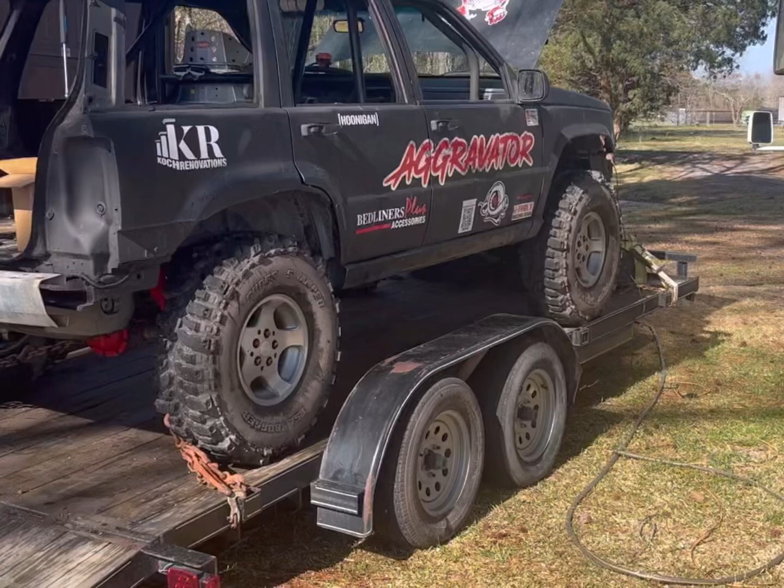So Jackson is at school. He's getting picked up right now. He's going to be here, but I'm going to go ahead and get started on a couple things without him so we can get this done before dark, hopefully.

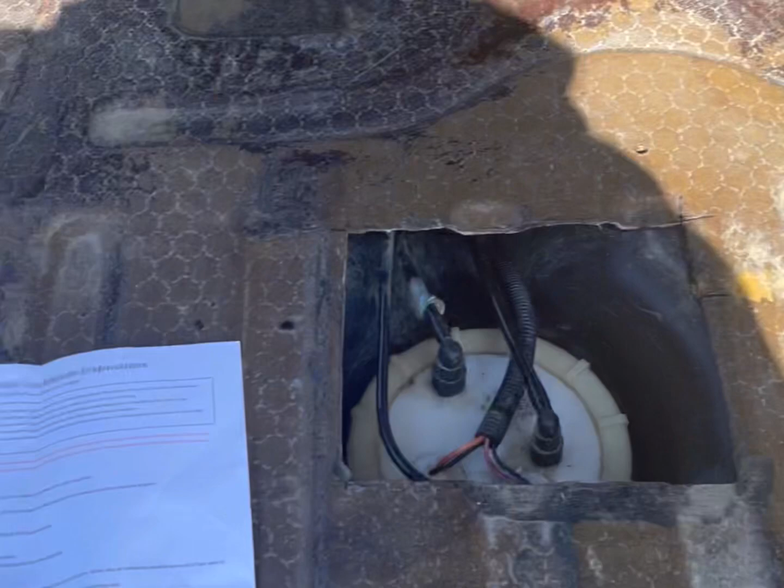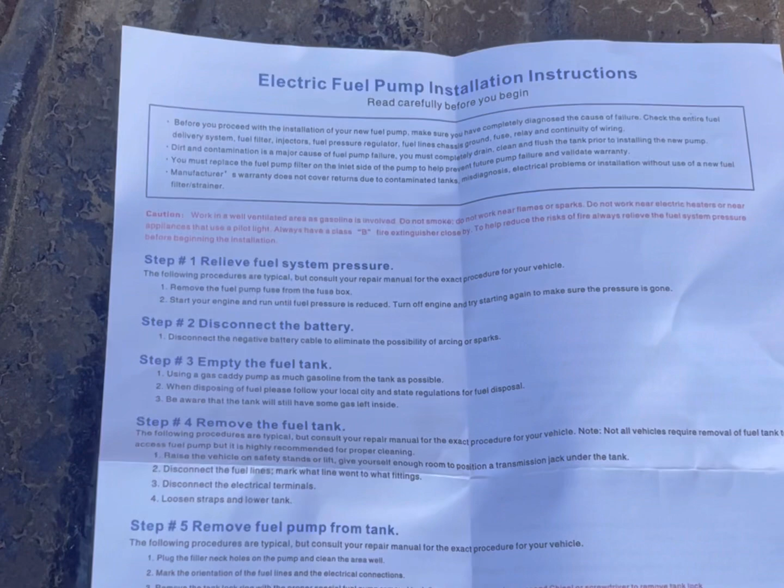You'll notice we got our new fuel pump here that we ordered from carparts.com, and we have the instructions. Step number 1 says relieve fuel system pressure. Well, we don't have to do that because we ran it out of gas and there's no fuel in it. Step number 2 is disconnect the battery.

Most cars, you got a battery there and you're going to want to disconnect those. With our truck, it's set up a little bit different. We have a battery kill switch in here, which cuts off all the power to the truck. And you can see if we turn this on, we have power. You can hear the beeping. If we turn that off, there's no more power. So that's the same thing as disconnecting the battery.

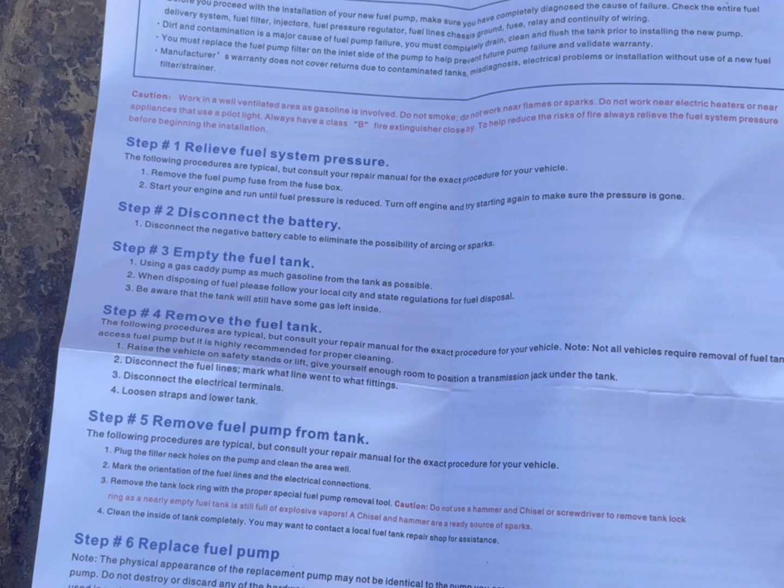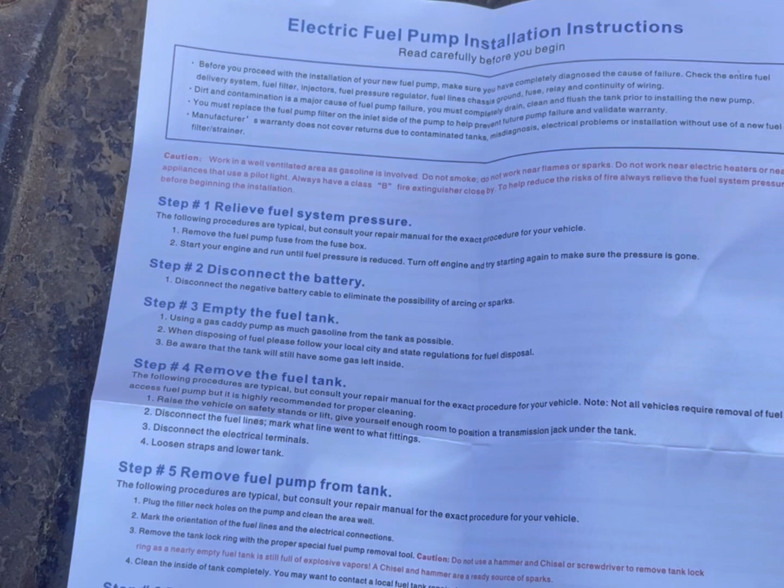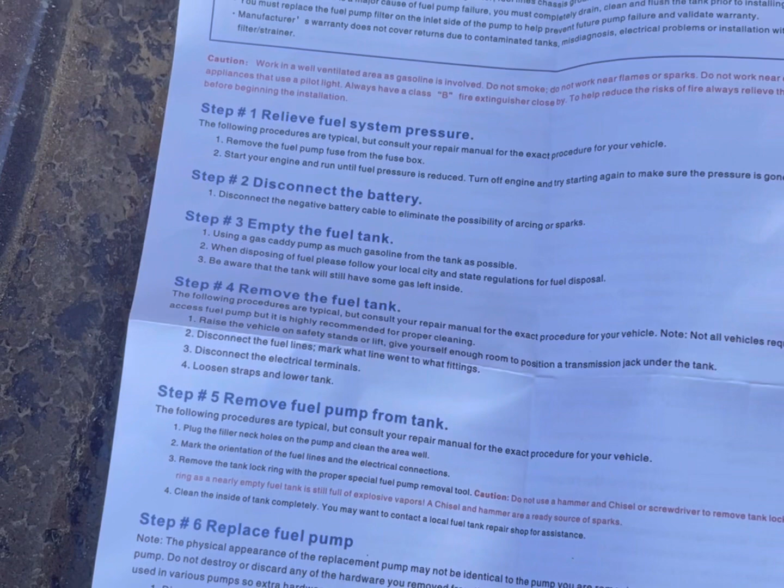So step number 3 says empty the fuel tank. We're going to ignore that step. We emptied it on our own at the racetrack by running it out of gas, and we didn't fill it back up, but we're going to have to do things a little bit differently, and I'll explain why in a second. Step number 4 is remove the fuel tank. Probably want you to empty the tank because it's pretty heavy, and if it was full, it'd be really, really heavy. But we're not going to remove the fuel tank.

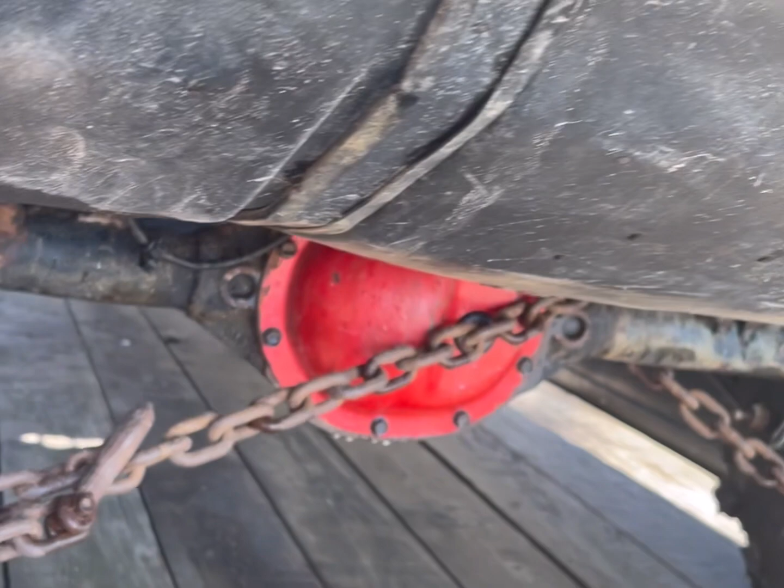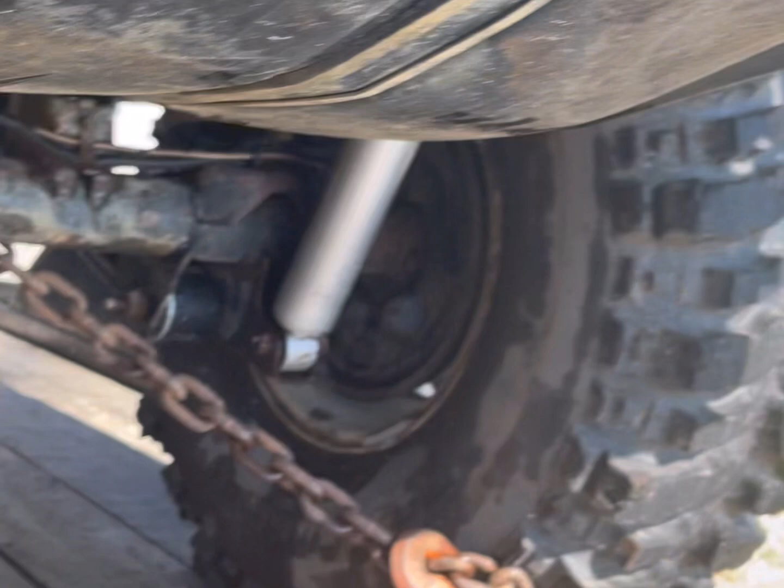On most cars, you would have to come over here, and you'd see they got these straps here, and somewhere along that strap is a nut, and you'd loosen that up, and these straps would come down and slowly lower the fuel tank down, and then you'd get rid of them. But since this isn't your average everyday car, and we've had similar issues with the pump already, we went ahead and just cut a hole in the floorboard, and we accessed the fuel pump that way.

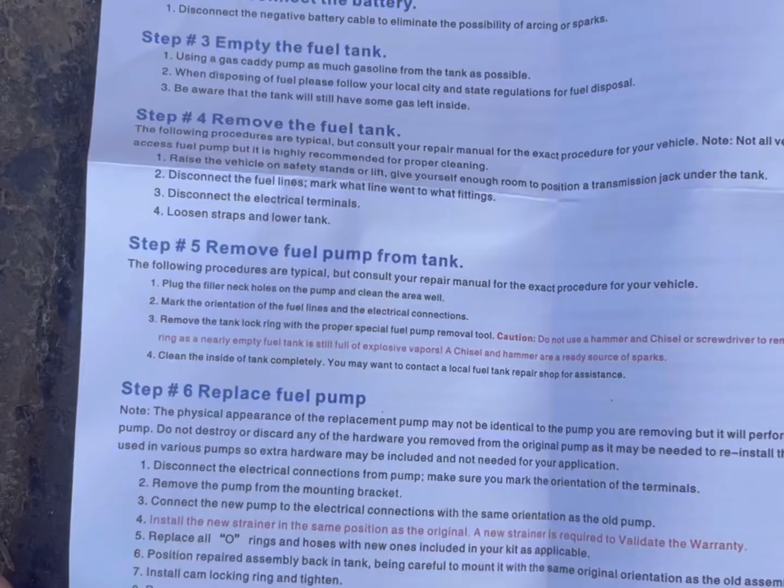Step number 5, remove the fuel pump from the tank. So, you can see on here there's this outer ring here. This turns, it's not going to turn very easily. What I'm going to have to do is get a hammer and a flathead screwdriver and tap it in the loosen direction until that ring starts to turn, and then I can turn it with my hands. So, we're going to pause and I'll update you in a minute.

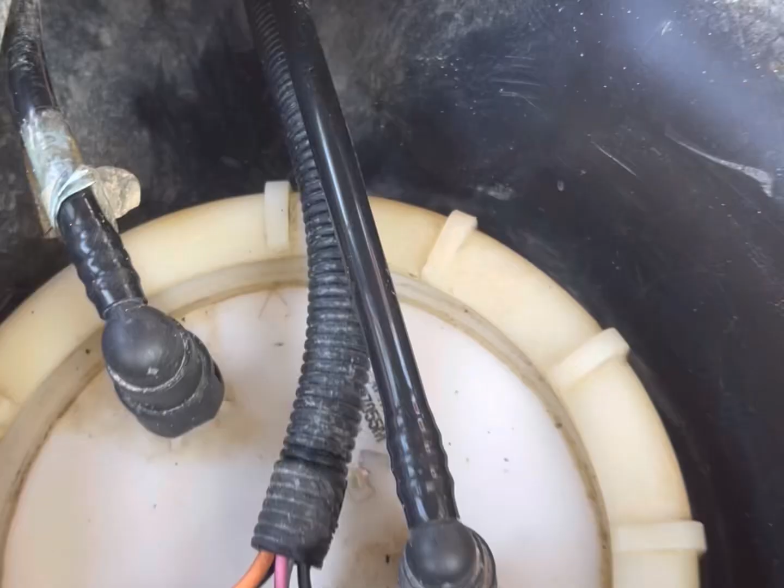Alright, so now we've loosened the ring. You can see you can turn it by hand. It turns easier. I'm going to take note of that little arrow that points towards the front of the truck. That's probably important for the positioning of the next one.

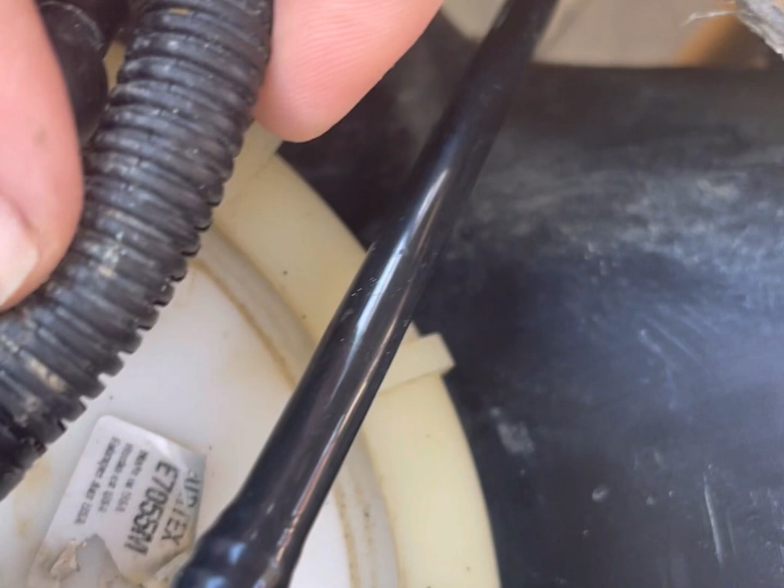Also, you'll see this electrical cord here. This has to be disconnected, and I don't know if you can see it up that way, but just in front of the fuel tank, that's the deck of my trailer that you're seeing. There's a little connection on here. I crawled underneath the truck a minute ago. I couldn't hold the phone at the same time. We went ahead and disconnected that. So now we're going to disconnect these other lines here and take note of which ones go there.

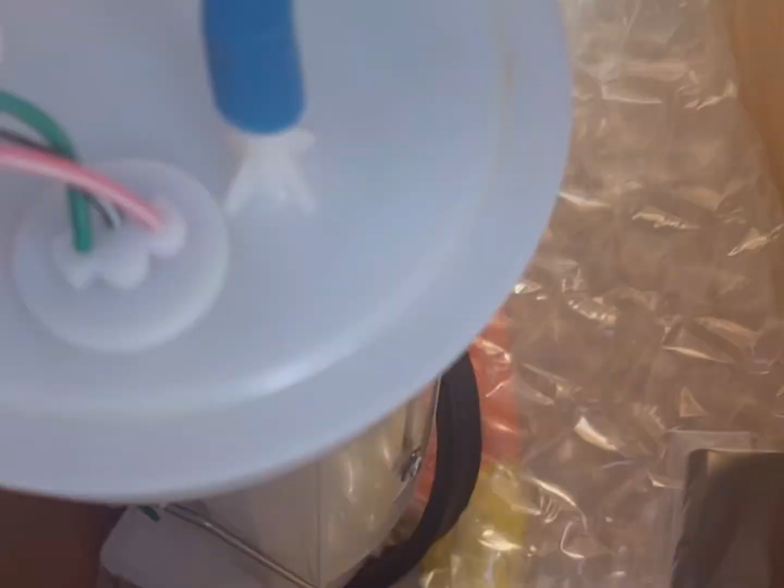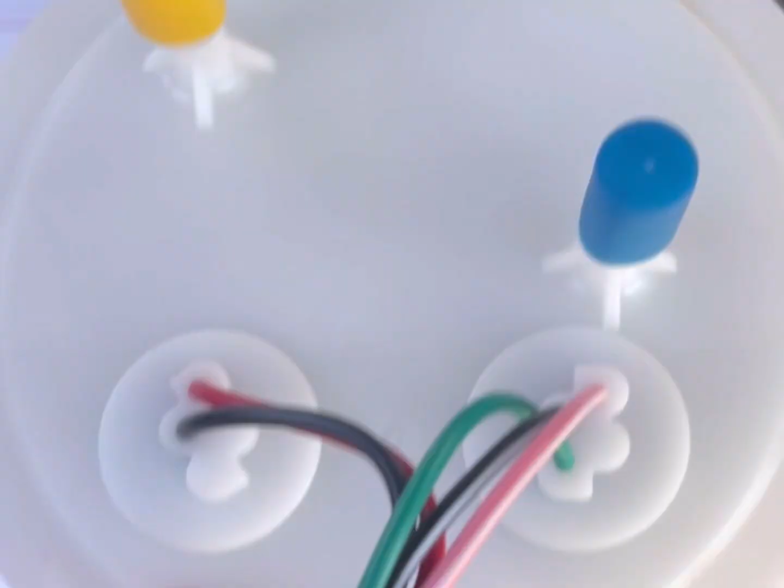So looking at the new one here, looks like it's set up much the same way. It's got the wires coming through. It's got the 2 little pegs for the fuel. This one doesn't have an arrow on it, but I'm going to remember that it's situated with the wires towards the back, just like this one. You got a little yellow knob and a little blue knob. And I'm going to remember that the blue wrapping there is going to actually go on the yellow knob. Don't ask me why, but that's what I'm going to remember so we put it back together right.

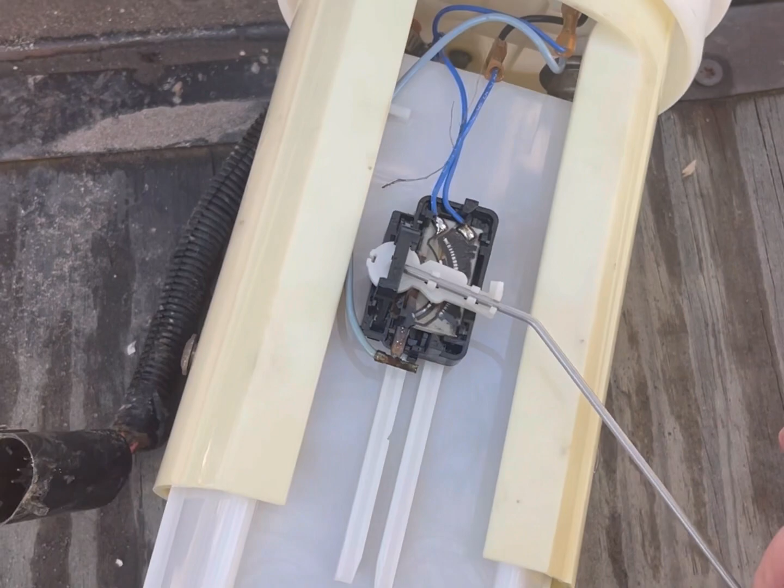Alright, a couple things to take note of. This is the sending unit. This is what sends the signal to the inside of your car to tell you when your tank is empty or full. It's got a float on it, it goes back and forth. This one we tested several months ago with a multimeter, and we moved it up and down and didn't get a different reading no matter how we set it. So we knew that part was bad, and unfortunately that and the fuel pump on this vehicle come all together, so if you're changing one, you got to change them both.

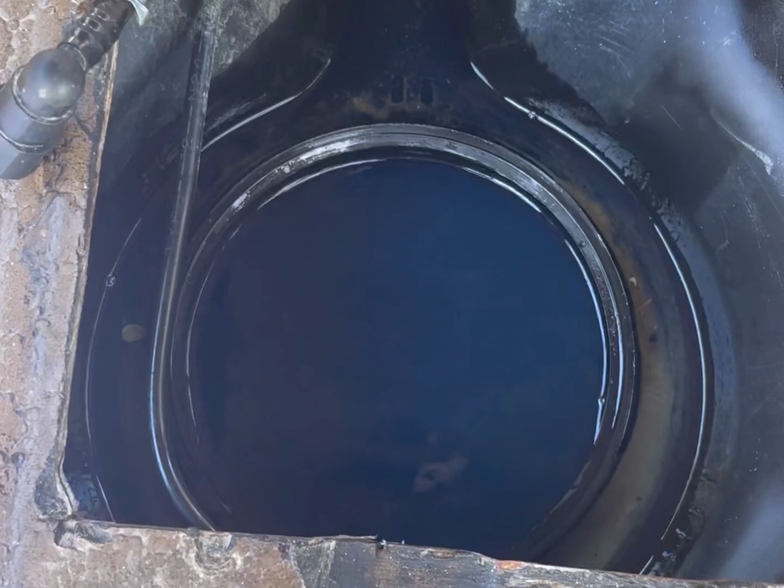I want to bring up again the note about disconnecting the battery, disconnecting all power. And that's probably why, you know, we had the tank full and the truck's sitting backwards. It's kind of leaning downhill a little bit. So we've got gas all over the place. So don't smoke while you're doing this, and definitely don't have anything that can make a spark anywhere in the area, or else it could be a very bad day.

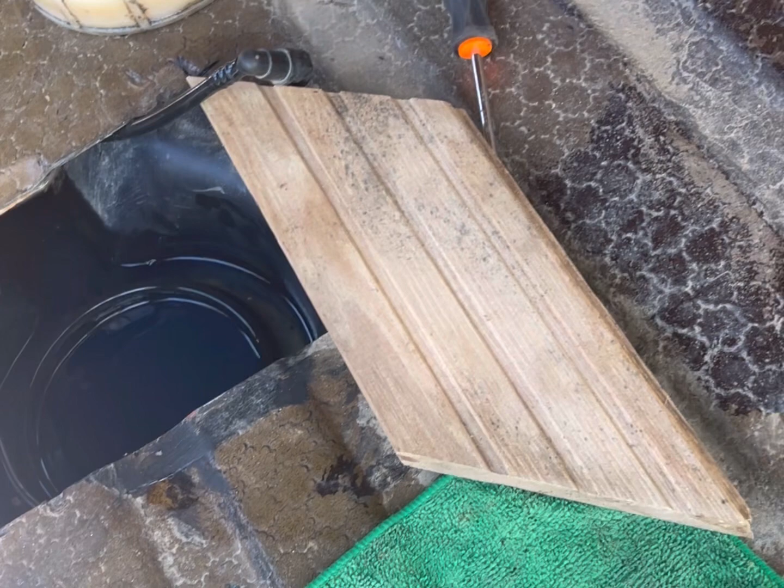Alright, next we're going to take the new unit. I'm going to carefully set it in place. It's going to probably spill a lot more gas as we're doing this, if anything should. Cable is up and out of the way. And yeah, it's spilling a bunch of gas. Fun, fun, fun.

Just let that sit there for a second. Again, I'm looking, you got the wires in the back, kind of letting that fill up on its own and sip up some of the gas. I'm going to kind of position it like the old one was, one in the front, one in the back.

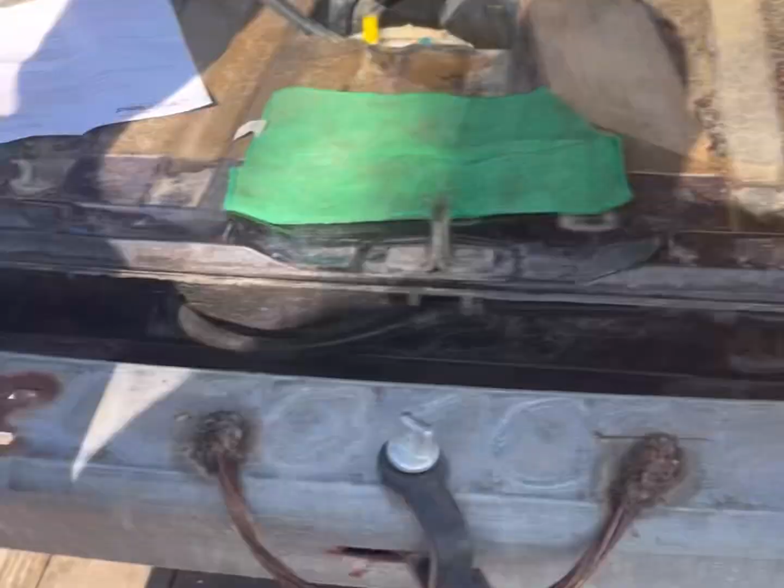What? You drained all my gas! Just a little bit. If we start a fire, I'm blaming it on you. Sounds good. You want to help me put it back together? Yeah. Alright. Let me show you what we need to do. First thing you need to do is go change out of your cool school clothes and your soccer jersey into regular clothes. Okay. Thanks, love you. Hey babe, you want to know what makes vehicles run? Gas? Yeah. They don't do very good without it, huh? Helpful to have it in there. Yeah. Thanks.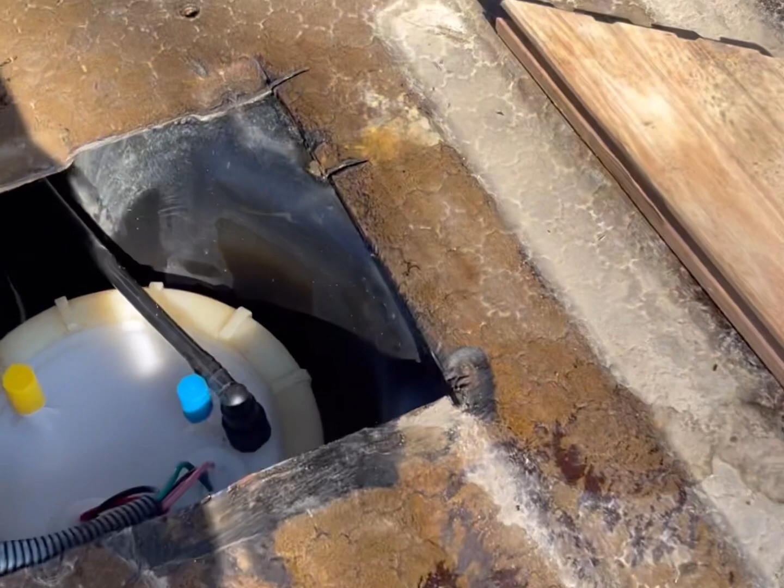Alright, you ready to help? Okay, what we're gonna do is, come over here. You got a screwdriver. You're gonna put it on these little notches and you're gonna tap it that direction. You're gonna keep going until it gets all the way tight.

You wouldn't happen to know where any of my hammers are, would you? Like, I know where two of them are. Where? In your tree fort? They're not there anymore. Yeah, I didn't touch them. Last time I saw them, they were over there. Last time you saw them, they were where? Knowing Mom building my desk or whatever, she probably took them. Oh, Mom did it. Okay. Yeah, climb in the truck.

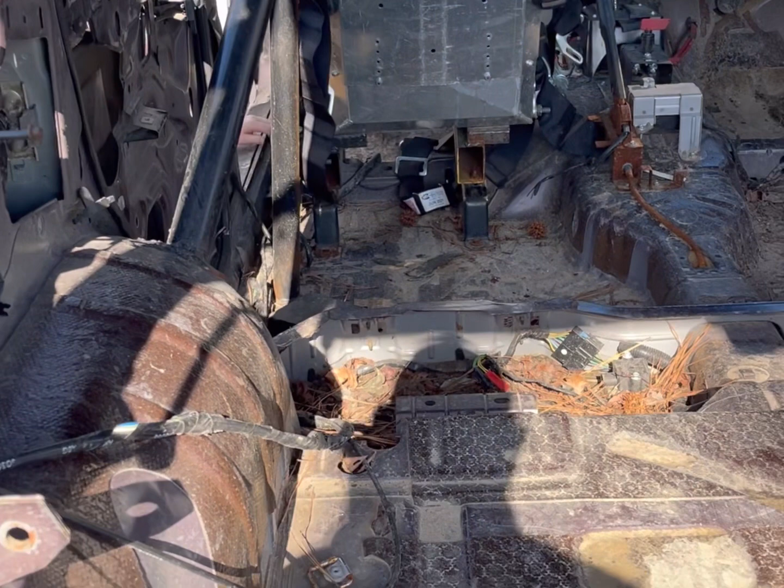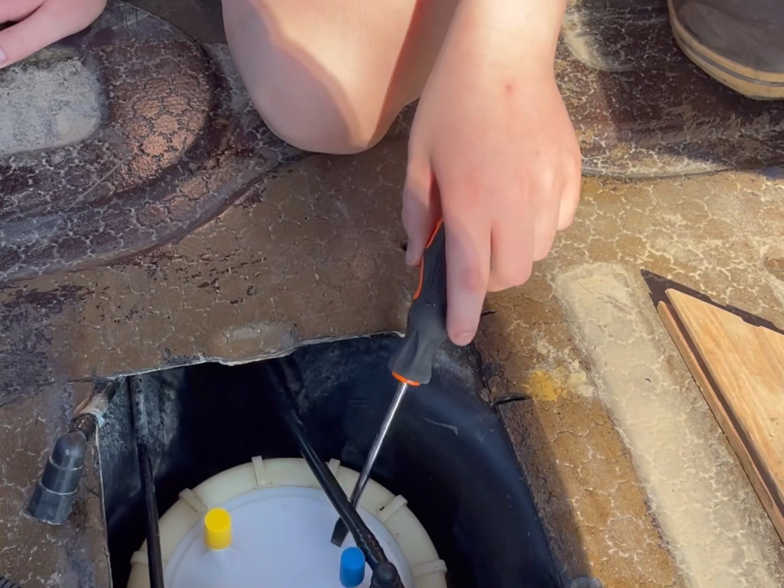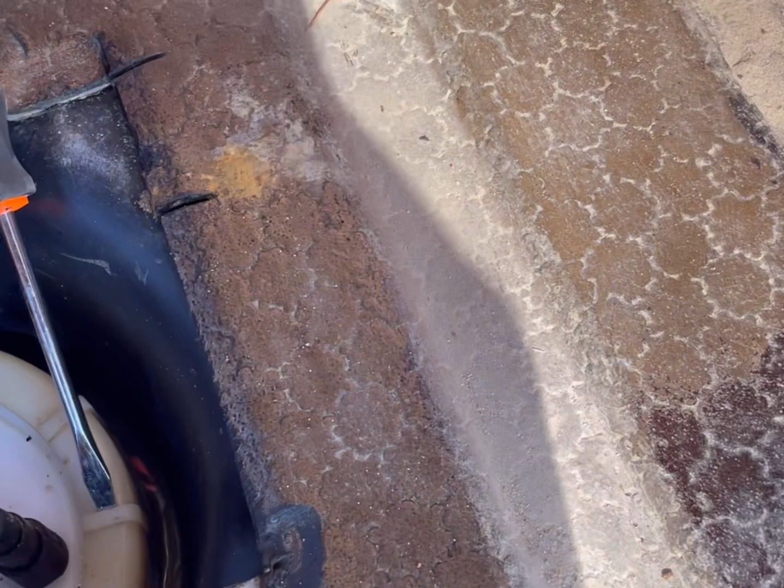Alright, got a screwdriver? Yep. Grab a piece of wood. You're going to use the piece of wood like a hammer, since we can't find any of my hammers. You're going to hold this on this notch and then tap the screwdriver. Got it? Now, just keep going until that thing's tight all the way around. You don't have to hit it real hard, just nice and soft. Just little taps, a little bit at a time.

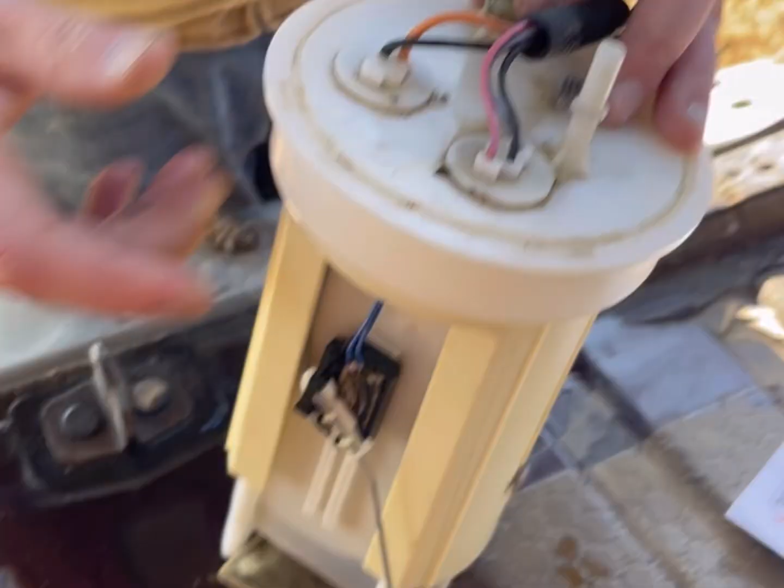Stop. So it looks like the new one does not have the little snap fittings, so we're going to have to figure out how to take these off and put them on the new one. Did you look in the box? I already did. Alright, so for anybody that was wondering, we figured out how to get these off. These have the little tabs that work on the connectors over there, but they also hold into this little flange.

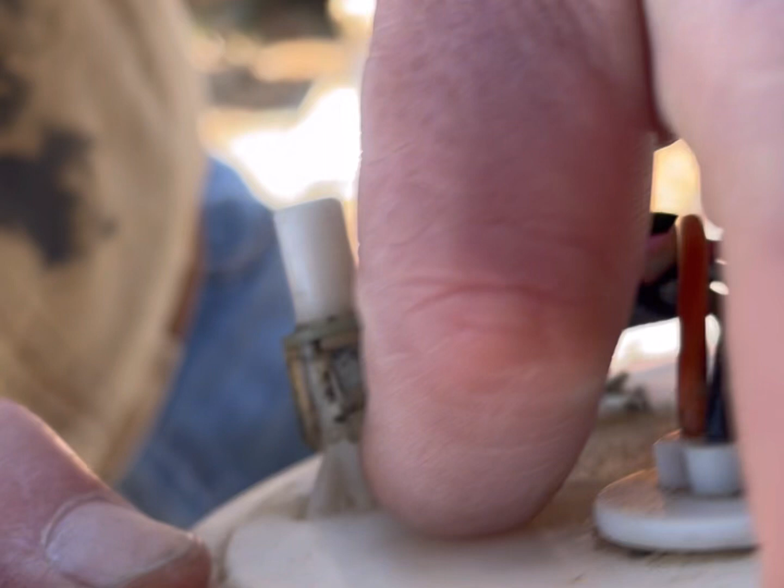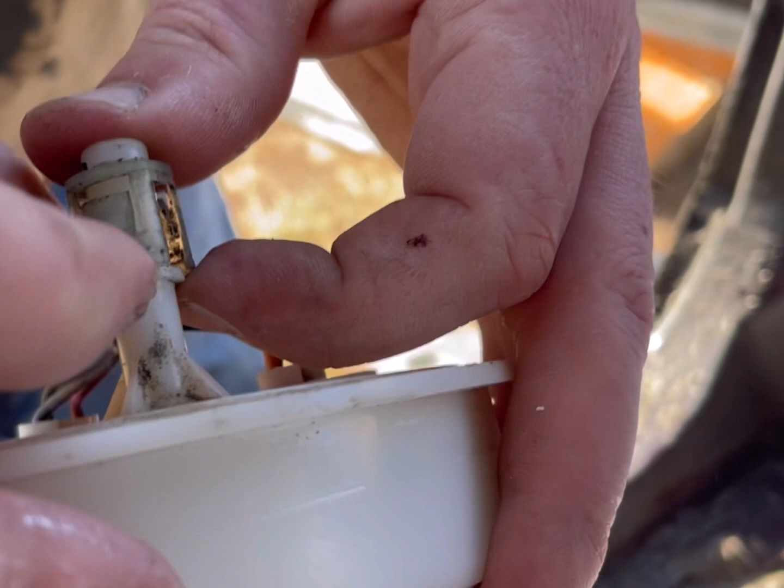So to get these off, you have to kind of pry out that little tab and lift up on one side. Hold that side up. You spin it around. You pry up. And do the other side. And then you pull it off. But you grab these little things right here and they slide right on. You click in like that. If there's not a click, then it's probably not in all the way. You just hit that and hear it click.

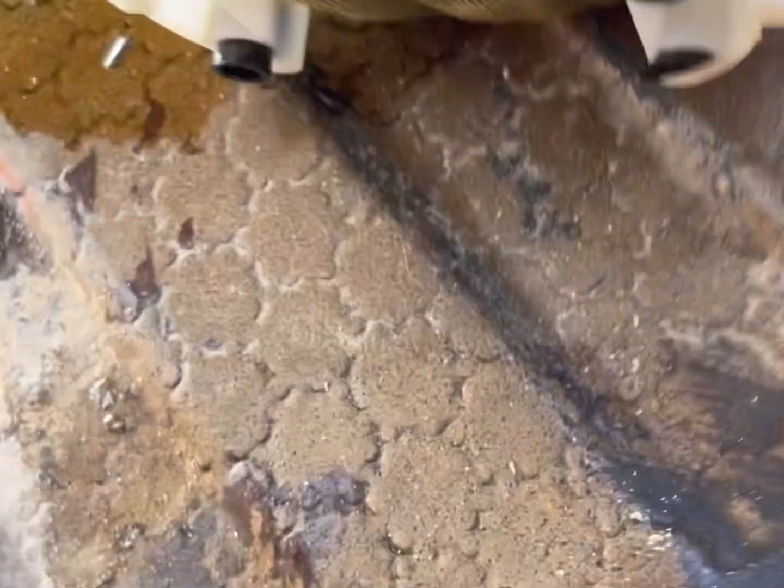If you don't hear it click, then you probably need to spin the little cap around a little bit because it's not lined up good. Like right now. There you go. It clicked. Now they're in place, right? Yep. So now the last step is we got to fish this wire back through the front. Again, most people would probably take the tank all the way off, but we didn't.

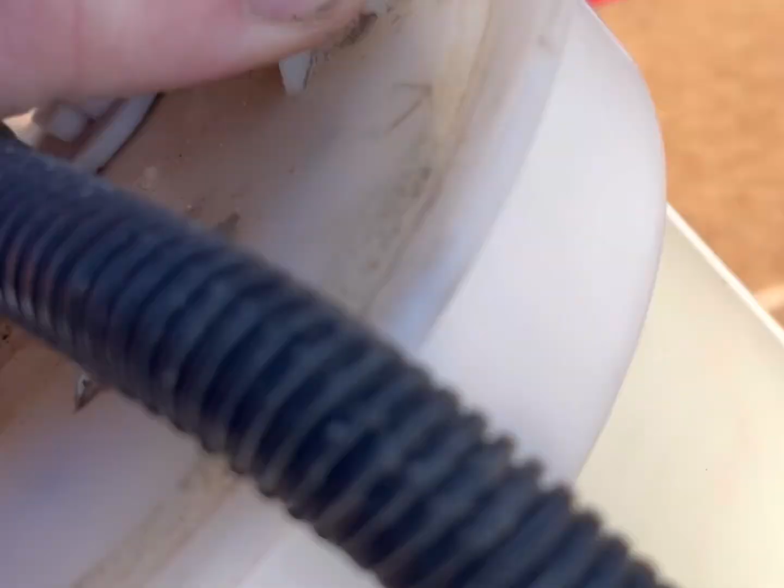And then I'm going to crawl underneath the car and reconnect that. You want to reconnect it? Yeah. All right, you crawl underneath there and reconnect it. Don't lay in the gas. It'll make you all itchy and burny. All right, look at the way it goes. Make sure it lines up. And then gently push it together until it snaps.

Yeah, babe. I think he's only texting you. Okay. And you're being recorded. Love you. Oh, love you too.

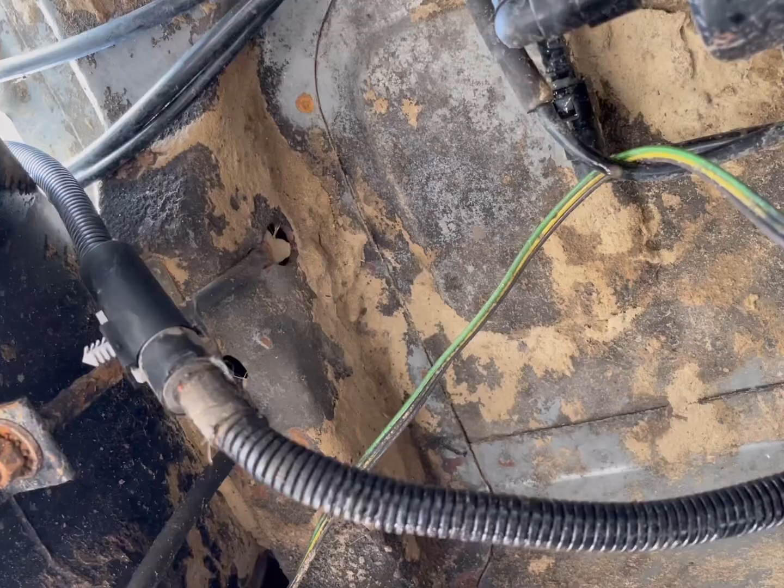It doesn't want to click together. You want some help? There's like a tab or something. Well, let me take a look at it real quick and make sure all the pins line up the same. Did you get it? Alright. We'll put the phone down for a minute. Alright, we have got it connected.

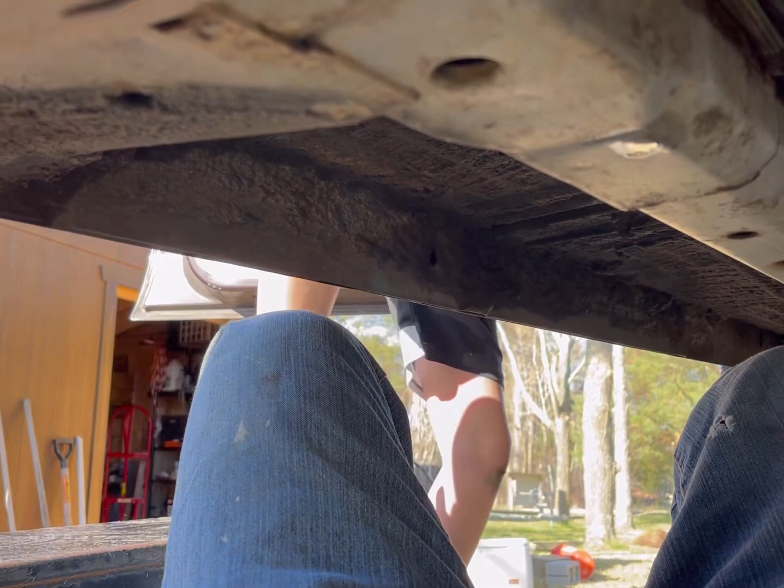Hey Jackson, why don't you get in your truck, don't start it. I want you to turn the power on and turn the key on and then turn the key off, and turn the key on and then off, but don't turn it over to start it. Do that a few times and I'm gonna listen to make sure it's working. I heard something. All right, do it slowly, do it a few times.

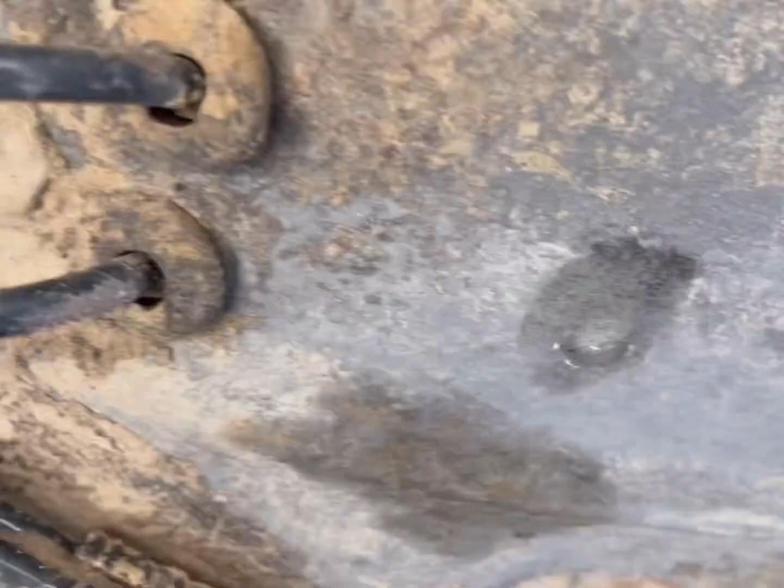All right, well maybe it knows you got enough pressure. Let me climb out from underneath the truck and then we can try starting it. All right, so partial good news. We have a gas gauge that works now. Bad news is the truck hasn't started yet. We're working on it.